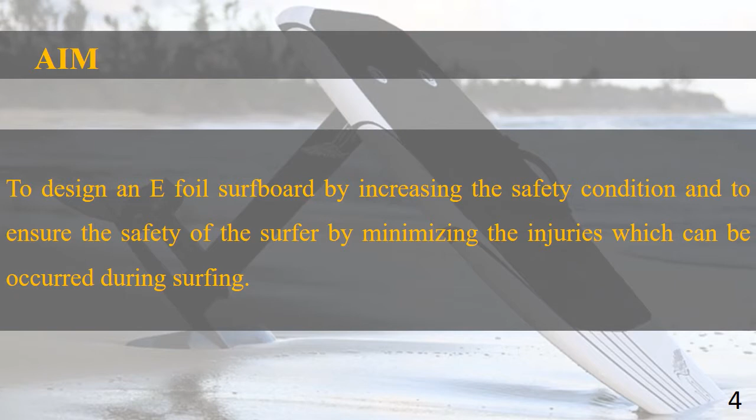Foil or e-foil. E-foil is a very sophisticated equipment which is used to increase the speed and distance that can be traveled using the surfboard. To ride this surfboard one needs good practice, so until then, riders or beginners will fall a number of times.

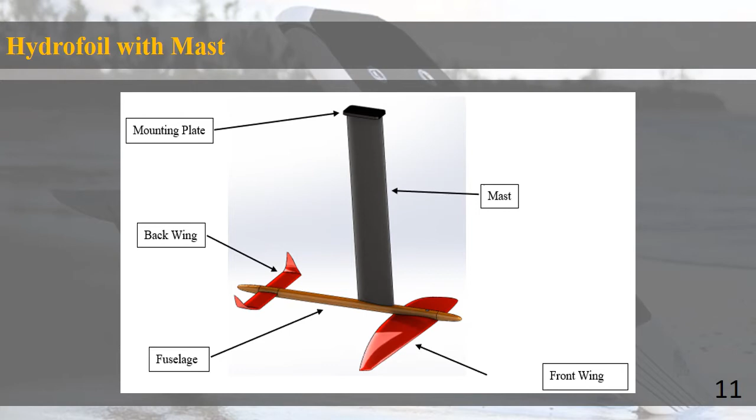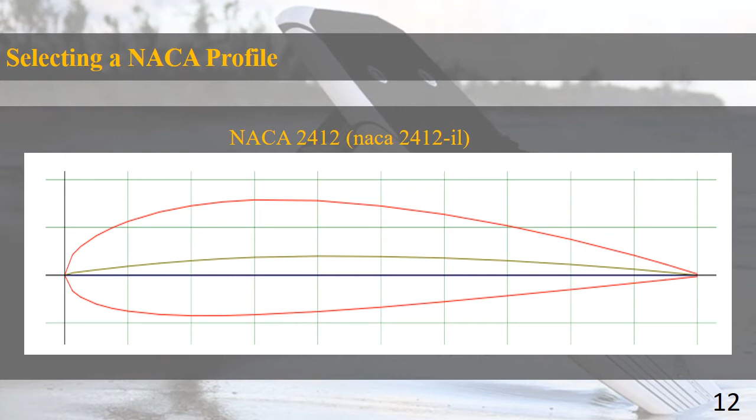Selecting a NACA profile: according to the airfoils on the NACA website, we searched some airfoils and selected a NACA profile to design the hydrofoil. Our approach to design was to determine the lift force needed from the NACA profile and calculate the Reynolds number according to our conditions. The Reynolds number could be calculated from the site, which has a Reynolds number calculator.

We took a velocity of 3 meters per second, a chord width of the airfoil of 0.16 meters, and the kinematic viscosity of water at 20 Celsius as 9.7937E-7 meters squared per second. Using these parameters we were able to select the airfoil according to the Reynolds number that we calculated.

After that we took the polar diagrams according to the Reynolds number of the most suitable airfoil shape. Using this Reynolds number calculation, we were able to decide the lift coefficient and drag coefficient according to the angle of attack using this data. We referred to the polar diagram, which can be taken from the details and comparison selection of the site, and after referring to the polar diagrams, we calculated the lift force.

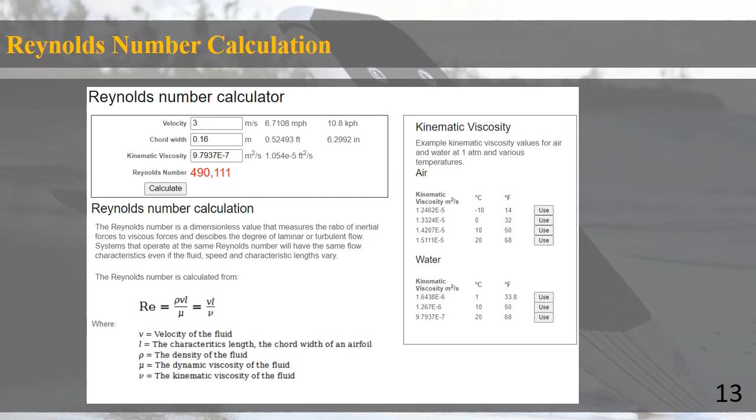Normally, in other countries these foils are fabricated using CNC machines, but we couldn't find a CNC machine with the technology to cut an angular hydrofoil for our design. So we decided to fabricate this hydrofoil using 3D printing.

We used PLA material to design this hydrofoil. We divided the design into several parts to make it easier to print. After that, these parts were joined using epoxy, which consists of resin and hardener.

We used the epoxy as glue after the resin and hardener were mixed together. The 3D printed core was coated with epoxy and consisted of two layers of carbon fiber. The wings were placed in a vacuum bag to ensure that the carbon fiber core conforms to the desired shape.

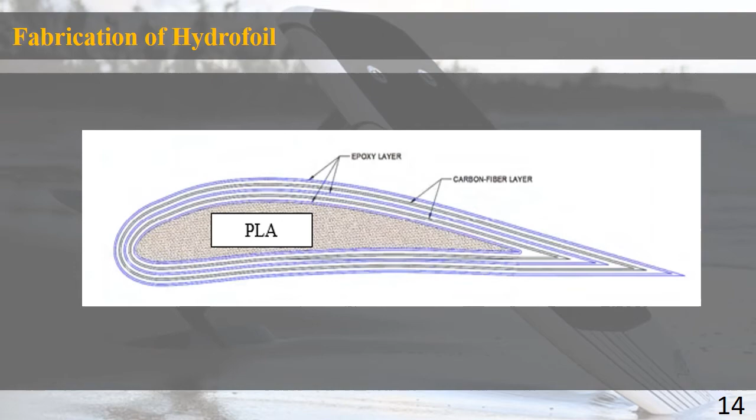Thread inserts: the threads were covered with tape to ensure the epoxy did not obstruct them. Normally, in the joints of this design, layers of carbon fiber were increased to strengthen these joints. After fixing the wings to the fuselage, we had to balance it to fix the mast, which we did using a level.

Mounting the hydrofoil to the surfboard: first we divide the surfboard into 3 equal parts and mark them. At one-third from the backward end we mark the position, then make a hole at that position for the mounting plate, which is then fixed.

Epoxy glue was used to have a strong bond. Also, 6 carbon fiber layers were used to strengthen this joint, as foil drag directly affects this joint.

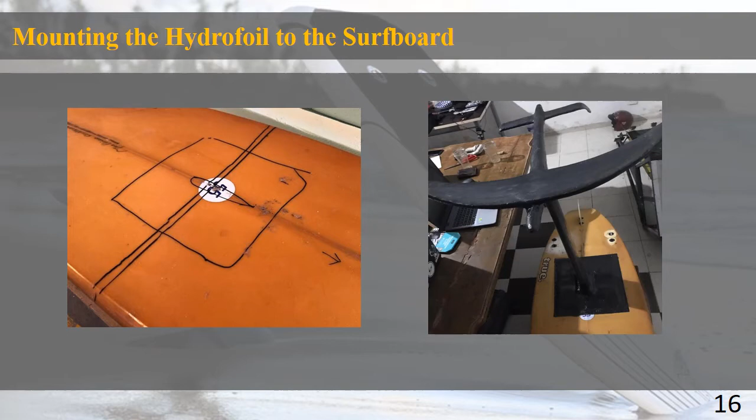And this is our propulsion unit, which consists of 3 main parts: the propeller, the electric motor, and the power supply unit.

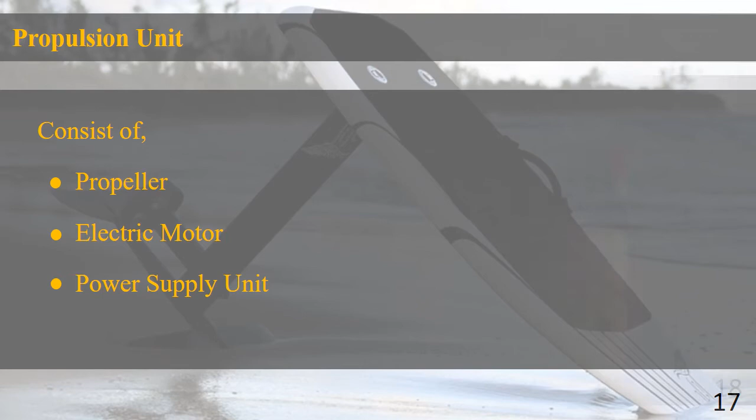The propulsion unit duct was made from a nylon bar, curved using a lathe machine with boring and turning operations. Epoxy glue was used to strengthen the bonding between the motor and the duct.

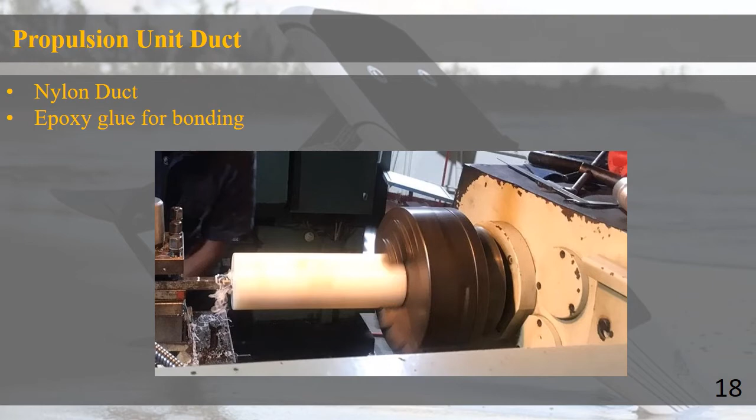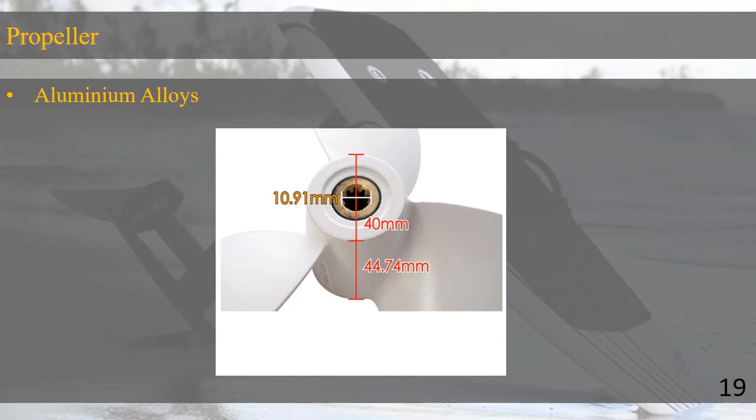We used the propeller, which was made by aluminum alloys. This is a medium sized propeller, and a propeller duct was used to protect the rider from injuries.

This is the motor which we used for our project, and this is a brushless waterproof motor with a reduction gearbox. Maytech is the brand name of this motor, and it requires 6s to 20s input voltage to operate. This motor operates at 9.8 Newton meters as its maximum torque.

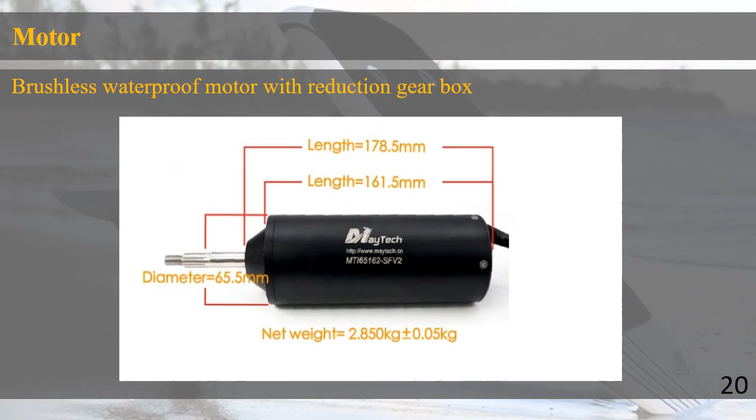This motor is especially used for e-foil, e-surf and hydrofoil e-foil surfboard applications.

This is the Maytech surfboard ESC, made by the Maytech company. ESC means electronic speed controller. There is a capacitor bank to balance the phase difference and get the maximum active power.

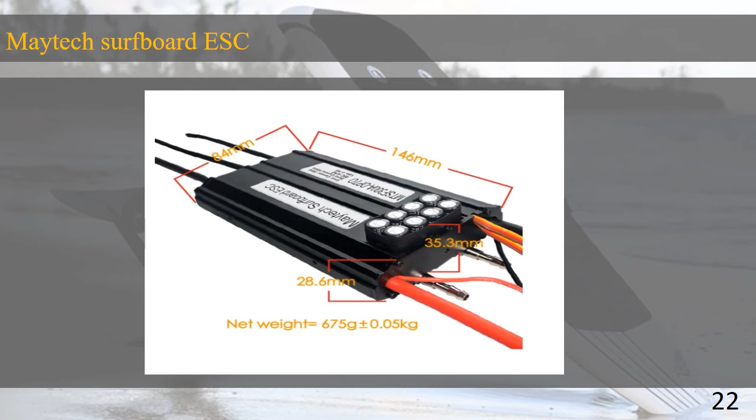Technical dimensions are also shown in the picture. This ESC is fully waterproof, and cooling is done by water cooling.

This is the main component of our project. As the problem statement mentioned, we have to thoroughly concern about the rider's safety. According to a certain inclination of the surfboard, this gyro sensor suddenly gives a signal to the propeller to automatically shut off.

Here we set our inclination angle as 45 degrees. This gyro sensor is connected with the Arduino Uno board and coded with that.

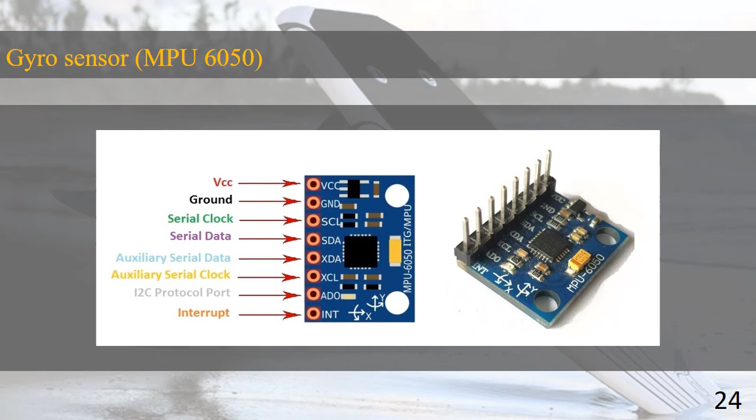As these e-foils are new to Sri Lanka as a concept, we faced many difficulties while undergoing the construction part of our project. Mainly those are the cost estimation, the COVID-19 situation inside the country, and the manufacturing difficulties.

In the cost estimation, it was one of the most difficult problems that we faced during the manufacturing process of our e-foil. Predicting the value of items that had to be purchased was not as easy as we thought.

We had to import most of the parts from abroad, and due to the COVID-19 global pandemic, the shipping costs were higher than previous. There were also restrictions from the countries we purchased items from, to release those from the customs departments.

Talking about the COVID-19 pandemic situation, due to the pandemic most workshops and industries were closed, and shipping and air travel were limited.

So we had to drag our time plan, and it was very difficult to find suitable skilled people for the fabrication process.

We were not allowed to go outside as before, so most of the time we had to manage with resources which were available inside KDU.

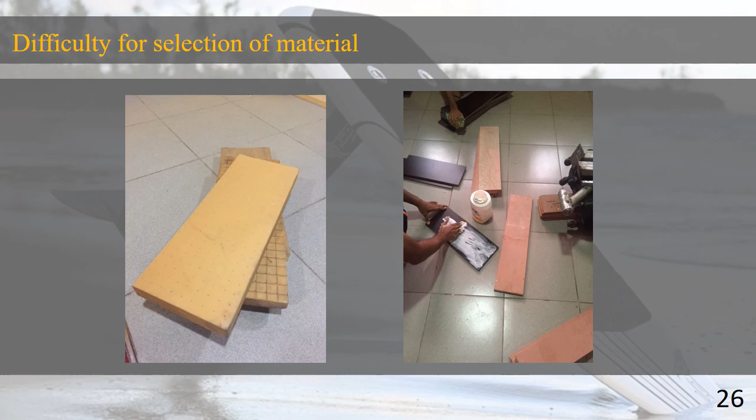When talking about manufacturing difficulties, the major issue was the fabrication of the hydrofoil. We tried using several materials where we failed almost all the time, but finally we were lucky enough to get polyethylene foam bars which we used to manufacture the hydrofoil.

The next problem was to lay the carbon fiber layer. It was not uniform, so we had to grind it to get a smooth finishing. That worked up to a certain extent, but high technology is required to get a better finishing.

The same incident happened when applying the epoxy layer. The surface was not as smooth as it should be.

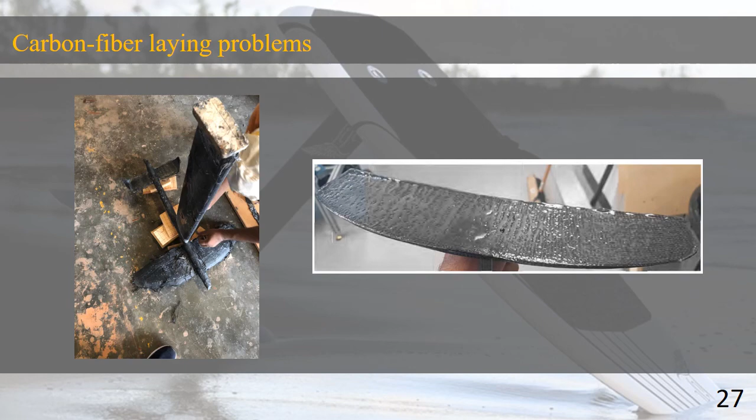In conclusion, in our project we experienced a lack of knowledge among Sri Lankan workshop employees. The complex solid designs were difficult to fabricate using CNC cutting, and another problem was the lack of standard materials in the local market.

So our idea is that this project should be further developed and tested so that it will mark a turning point in the Sri Lankan business market as well as the tourist industry.